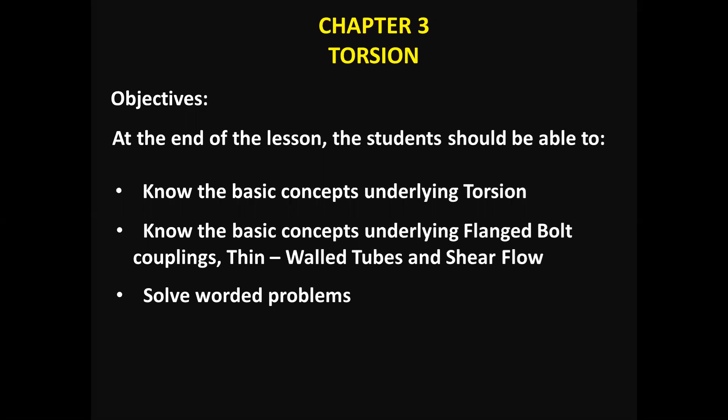So we have now the definitions of torsion. First definition, torsion is the twisting of an object due to an applied torque. Other definition of torque, yung torque na pinag-uusapan natin, actually ito yung moment of a force. So again, let me repeat the definition of torsion. Torsion is the twisting of an object due to an applied torque. So that was its first definition.

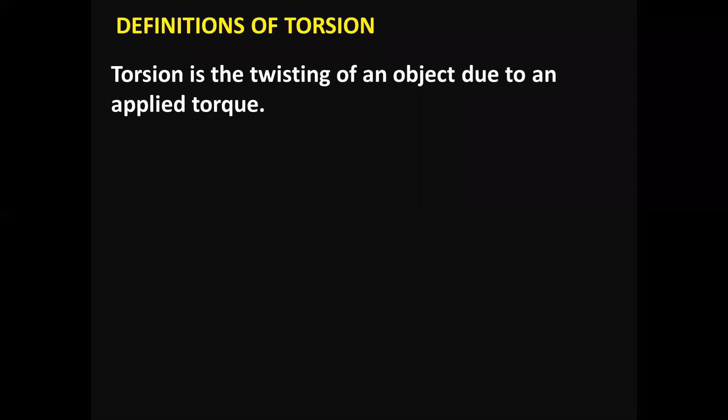Torsion is expressed in either the Pascal, an SI unit, newtons per square meter, or in pounds per square inch or PSI, while torque is expressed in Newton meters or foot-pound force. So yan ang mga units na meron tayo kapag torsion ang pinag-uusapan. And of course also the torque na ang meaning is also moment of a force.

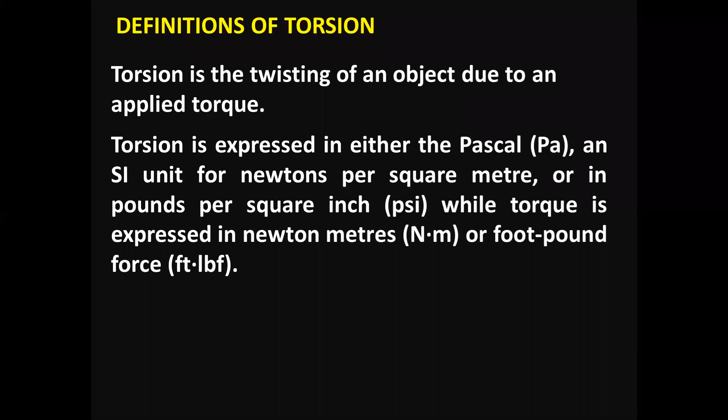Examples ng torsion. Given a plastic ruler, if twisted between both hands, the ruler is said to be in a state of torsion. Try nyo kumuha ng plastic ruler and then i-twist ninyo. Tendency niyan, baka mabali pa nga yan kapag tinwist natin. Okay, when we turn a key in a lock, the handle or shank of the key is actually also in torsion. Propeller shaft on a ship, also an example of torsion.

Sa bahay na lang kapag naglalaba, kapag pinilipit mo yung damit para maalis yung bula or tubig, that is actually an application of torsion because there is an event of twisting by both ends. Malinaw ba ang definition ng torsion? Is it very clear kung ano ang ibig sabihin ng torsion, mga anak? So please respond while I'm asking. Yes po, sir. Okay, very good. So let's proceed.

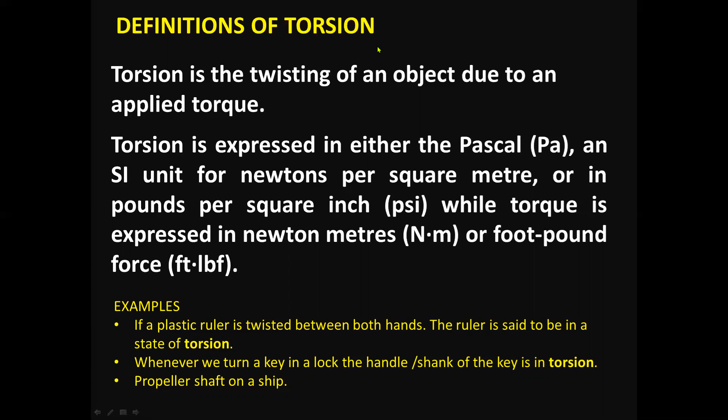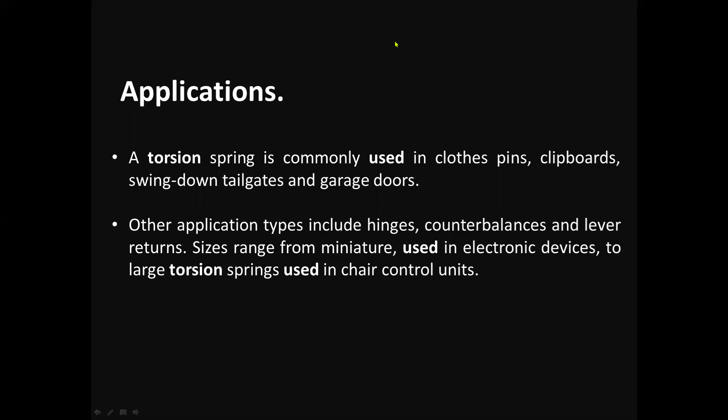Applications again about torsion. A torsion spring is commonly used in clothespins, clipboards, swing down tailgates, and garage doors. Other application types include hinges, counterbalances, and lever returns. Sizes range from miniature used in electronic devices to large torsion springs used in chair control units. So, ang dami palang importance ng torsion, especially sa applications nito in real life.

So we have now the following torsion formulas. Let me enumerate them to you. First, we have the maximum shear stress due to torsion. So importante ang torsion pagdating sa shear stress. Okay, this is the symbol for maximum shear. We have the shear maximum equals to TR over J, wherein T ito yung ating tinatawag na applied load.

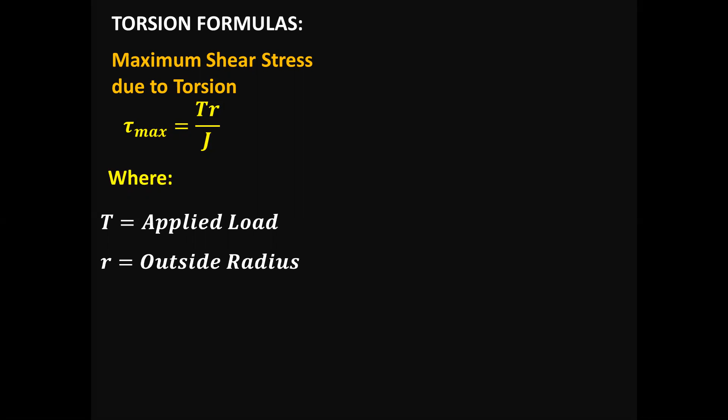And then R is the outside radius, yung outer radius. So yung radius is kalahati ng diametro ng ating, for example, let's say we have a shaft. Kinokonsidera natin yung kanyang outside radius. And then J, we have the polar moment of inertia. I think hindi na kayo mahihirapan regarding moment of inertia kasi tapos na kayo ng statics of rigid bodies wherein you took the moment of inertia. Probably nasa last topic ninyo yan sa statics of rigid bodies.

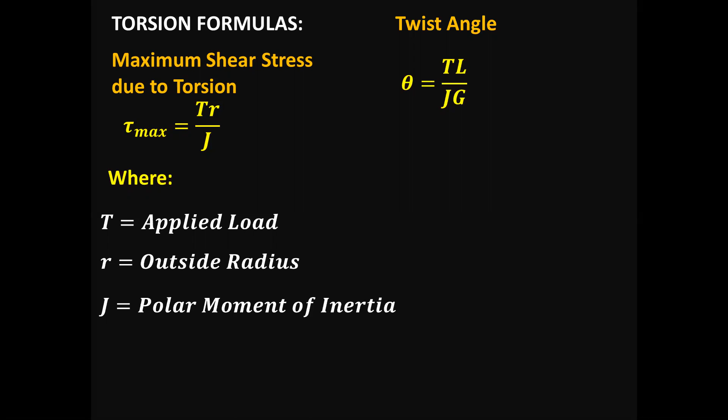And then we also have the twist angle formula wherein theta is equals to TL over JG, where L stands for the length of the shaft. Nakakita na ba kayo ng mga shaft? Alam nyo ba ang itsura ng shaft? Hello, class? Yes po. Okay. And then we have G as the modulus of elasticity in shear. So kanina, naibigay ko lang ang ibig sabihin ng T and J. So yan naman ngayon ang para sa L at saka G, variables ng mga formulas natin.

Then right after that, for solid shaft, when it comes to J, ano bang ibig sabihin ng J? Pakita ko ulit. Anong basa sa J? Pakibasa mo nga, Oliver L. Banani, anong ibig sabihin ng J? Polar moment of inertia. Okay, so polar moment of inertia.

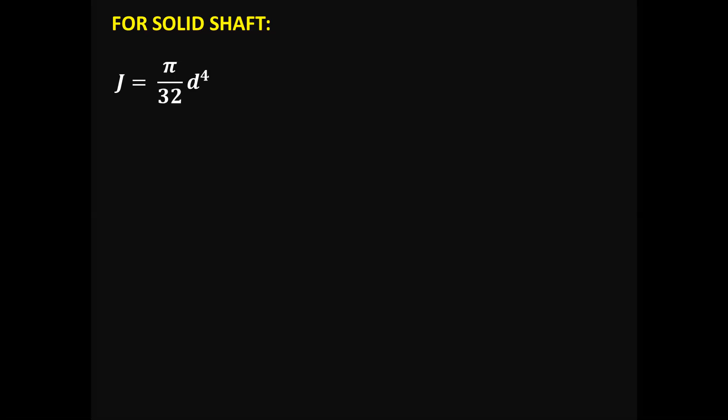Now let's talk about the solid shaft. Sa solid shaft, ang ating polar moment of inertia formula is pi d to the 4 over 32. So we have pi d to the 4 over 32 for a solid shaft. And for a hollow shaft, ibig sabihin may butas yan, no? So merong inner diameter and outside diameter tayo dyan na kinokonsidera kapag hollow ang given shaft. At siyempre may ibang formula yan sa paghahanap ng moment of inertia.

J is equals to pi over 32 times the difference between the outside diameter to the fourth minus the inner diameter to the fourth of that given hollow shaft. So yan ang formula ng ating J. And now let us proceed to the power transmitted by a shaft. We also have this formula, P is equals to 2 pi times T times N. Okay, so ano bang ibig sabihin ng mga variables na meron na naman tayo dito?

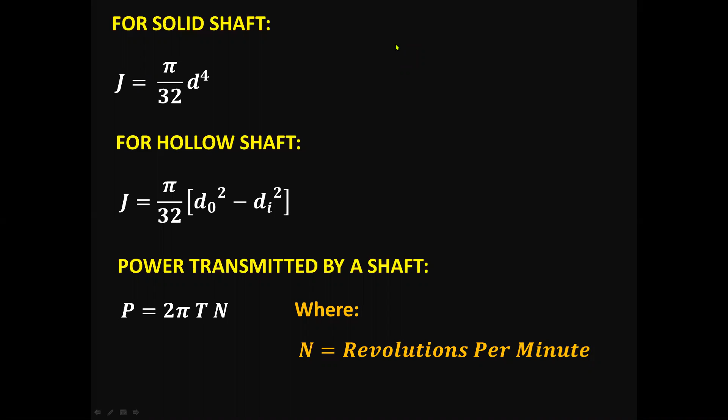Wherein N stands for the revolutions per minute or RPM. Kapag naka-encounter tayo ng mga problems, usually hindi naman binubuo yung mga wordings na yan o binibigay na ng abbreviation. RPM, ang ibig sabihin nun, revolutions per minute. So that's all about the power transmitted by a shaft formula. Now let's proceed.

What is the minimum diameter of a solid shaft that will not twist through more than 3 degrees in a 6-meter length when subjected to a torque of 14 kilonewton meter? What maximum shearing stress is developed? So let us use for the value of G 83 giganewton per meter square or gigapascal. So how do we solve the problem now? Paano natin hahanapin ang ating maximum shearing stress for that solid shaft?

Kanina, ibinigay ko yung formula ng maximum shearing stress. Am I right? So ano ba yung formula ng ating maximum shearing stress kung natatandaan nyo pa kanina na aking binigay sa screen sa ating discussion? Ano yung formula natin ng maximum shearing stress? Di ba kayo nagtitake down notes habang ibinabahagi ko yung mga yan sa inyo? Di ba maalala? So if you want, balikan natin.

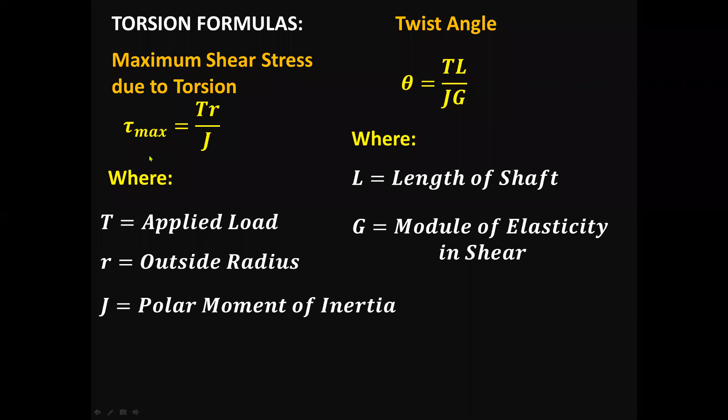So ito yung formula ng ating maximum shear stress due to torsion. Di ba TR over J? And it was mentioned a while ago that ang given natin is a solid shaft. So definitely kailangan natin ng formula ng maximum shear stress due to torsion and also for the solid shaft ang value ng J, pi over 32 d to the fourth power. Okay. Fast forward na natin. So this is how we solve the problem. For the solution,

first, let me write the formula for the theta, which is equal to TL over JG. Okay? Di ba't may given angle? Ang sabi, a solid shaft that will not twist through more than 3 degrees, in a 6-meter length when subjected to a torque of 14 kilonewton meter. Ang haba ng ating shaft is 6 meters. And it is actually subjected to a torque of 14 kilonewton meter.

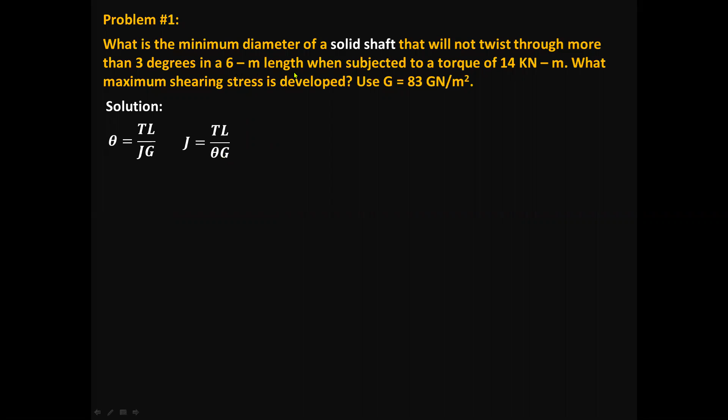Now, the problem is, what is the minimum diameter of a solid shaft that will not twist through more than 3 degrees? Okay. And the formula for J is equals to TL over theta G. Why? We have only transformed our formula kanina theta in terms of TL over JG. Now, ang hinahanap naman natin ngayon is the value for our moment of inertia, which is J. Kung titingnan natin yung ating mga given, ang G, tama? That is 83 gigapascal. Given ang length, we have 6 meters. And then, given ang theta, we have 3 degrees. So, let's proceed.

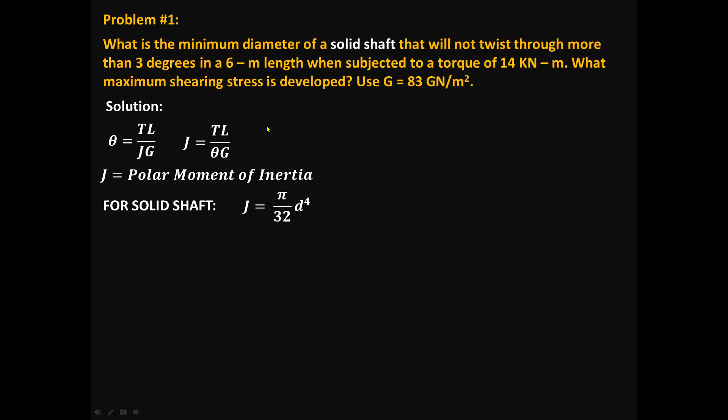J stands for the polar moment of inertia, and we have to determine the value of J. For solid shaft, it was mentioned a while ago that our formula is J is equals to pi over 32 d to the fourth power. So, anong gagawin ko ngayon dyan sa formula ng ating J for solid shaft? As we can see sa above, may formula din tayo ng J is equals to TL over theta G. Diba, binigay ko yung mga formula sa inyo kanina, yung twisted angle formula. Okay, can you still recall the twisted angle formula that I gave you? So let us play now with our formulas.

The next step is that I'm going to equate both values of J. First value ng J natin, TL over theta G. And then another formula for J, since solid shaft yan, is pi d to the 4 over 32. I'm going to equate the two values of J, which means J is equal to J. That is why we have arrived with this equation, pi d to the 4th power over 32 is equal to TL over theta G.

Nakakasunod pa ba kayo? Naintindihan niyo ba yung flow ng solution natin? Yes, pa. Okay.

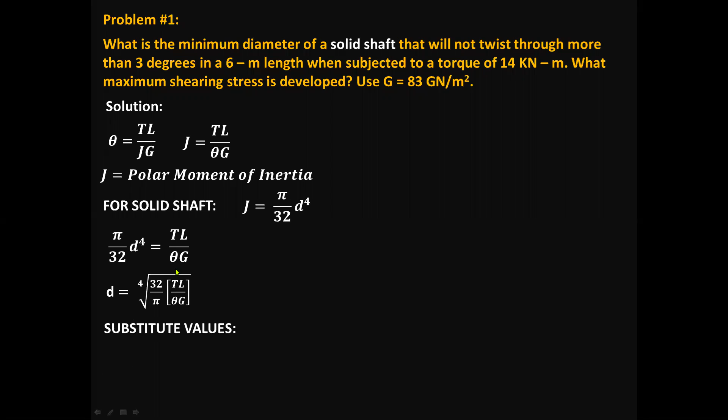And then we can compute for the value of the diameter of the solid shaft by having this transformed formula. So, paano tayo nakabuo ng formula na yan? Simple lang, pinag-equate natin ang dalawang values ng J. That is why we have now the fourth root of 32 over pi times TL over theta G as our formula for D. And then afterward, we have to substitute all the values that we have as givens. Substitution tayo. Yan, and we have it.

So we have 32 over pi times 14,000 Newton meter. 14 kilonewton meter is also 14,000 Newton meter. Kinonvert ko lang ng Newton ang 14 kilonewton meter. And then, ano ba yung L? Given naman, 6 meters. Ito yung mga given natin. 6 meters, this is our L. And then, we have 14 kilonewton meter, given ang ating torque value. And then, given ang ating G.

Ito siya, which is 83 times 10 to the 9 Newton per square meter or 83 gigapascal. Kapag giga, ang ating scientific notation is always times 10 to the 9. Kung mega naman is times 10 to the 6. But in this case, we have gigapascal. And then we have 3 degrees.

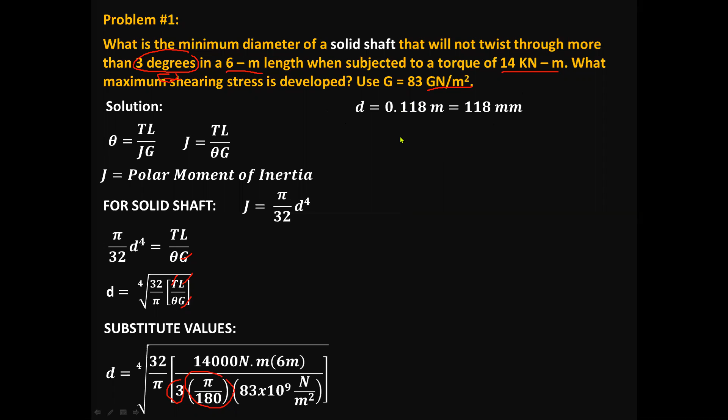For the maximum shearing stress developed, we will adopt our formula, and that is tau max equals TR over J. So wala na tayong problem dyan. Pwede na nating kalkulahin ang ating given problem at malalaman na natin ang ating maximum shear. Okay, just try to imagine, bakit tayo nag-arrive sa ganyang equation? Tutulungan ko kayo.

Shear maximum is also the shear; hindi ko na lang nilagay muna yung maximum para mabilis. The radius is also D over 2. Can you follow? The radius of any circular solid shaft is always equal to the diameter divided by 2. Klaro ba mga anak yung explanation ko? Okay. And the J, since solid shaft yan, ang value ng J natin is this one.

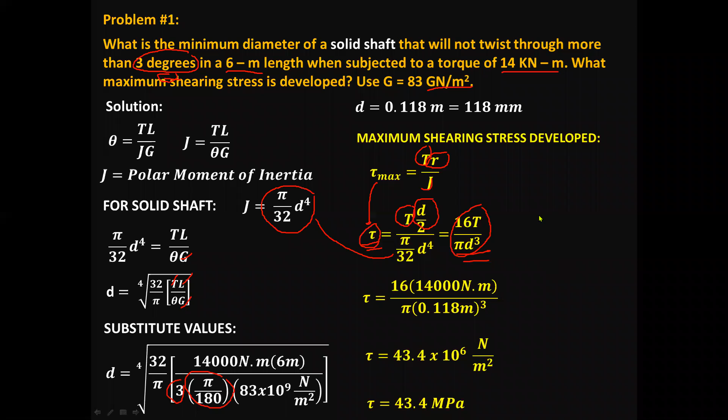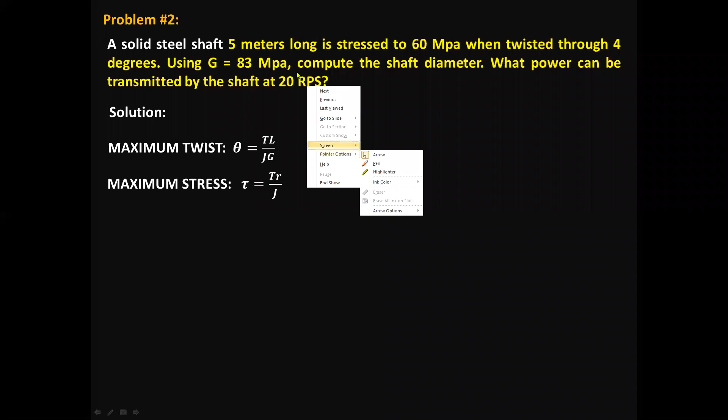What is this 5 meters all about? Anong role yan sa formula natin? Length po. The length. So we have the length. Okay, how about the 60 megapascal? What is this? What is 60 megapascal in our given problem? Stress.